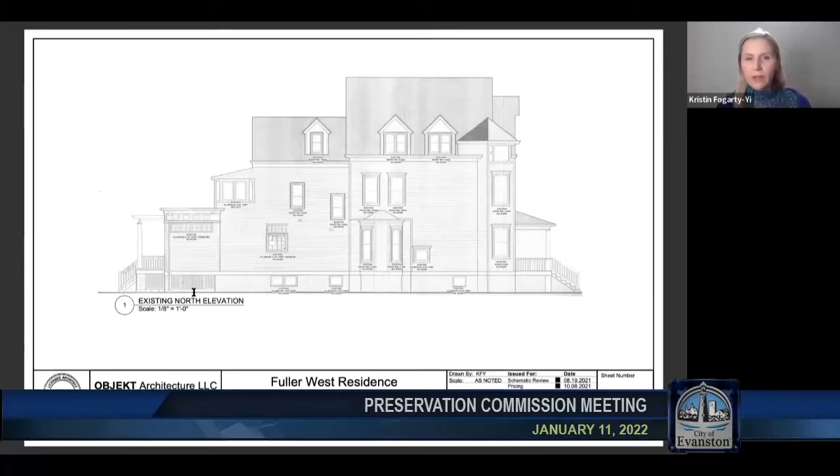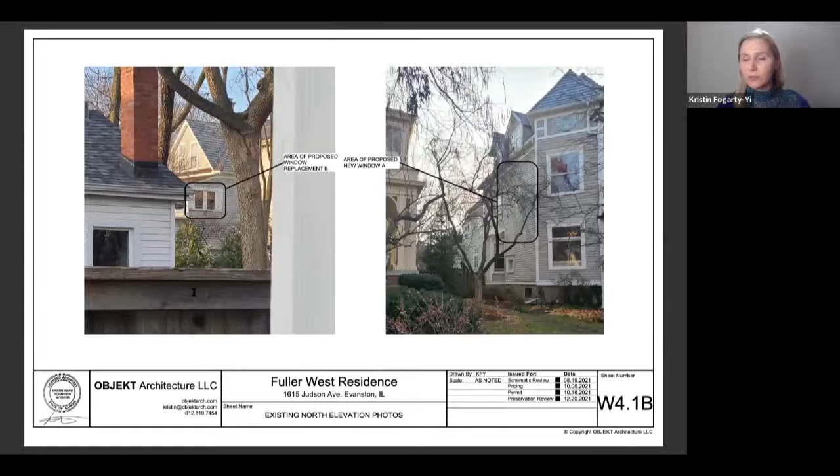If you go to the next page, in the area where we'd like to add window A, this is because there is an existing stairwell there, and the window right next to it to the left is currently the only window in the stair hall. We are adding a laundry room there, so that will no longer add natural light to the stairwell. So to keep having natural light in the stairwell, I propose to add a new window at the stairwell.

Window B at the rear of the home is to be replaced with a new window. It's basically in the same location as the existing one, but with slight modifications - it will be 2 casement windows next to each other. There is also an existing flat roof, an addition added in 1997, and we'd like to turn that into a roof deck. So I propose to add a small, very delicate metal railing to act as a guardrail, because the existing parapet is only 2 feet tall.

This was an addition added in 1997, and the interior floor plan is changing. So to do that, I am proposing to rearrange the windows and add a patio door, which is window C, and also a bay window at window D, because the new floor plan needed a little extra room at the primary bathroom. The new roof would be overlaid over the existing roof. And these are the details of those windows.

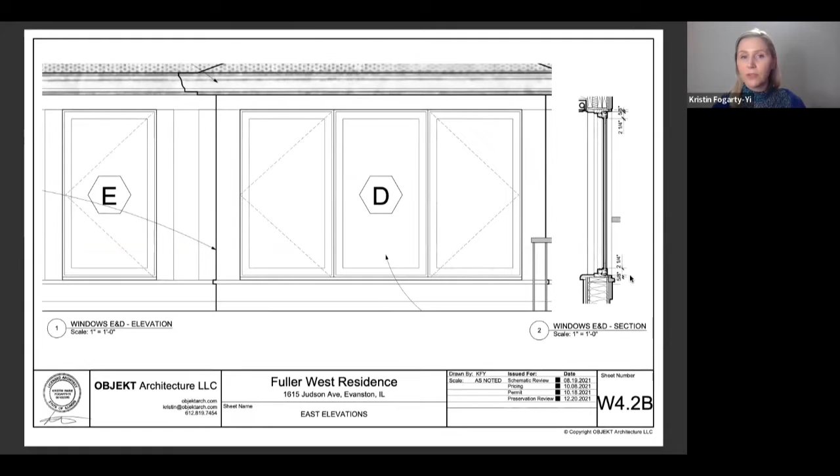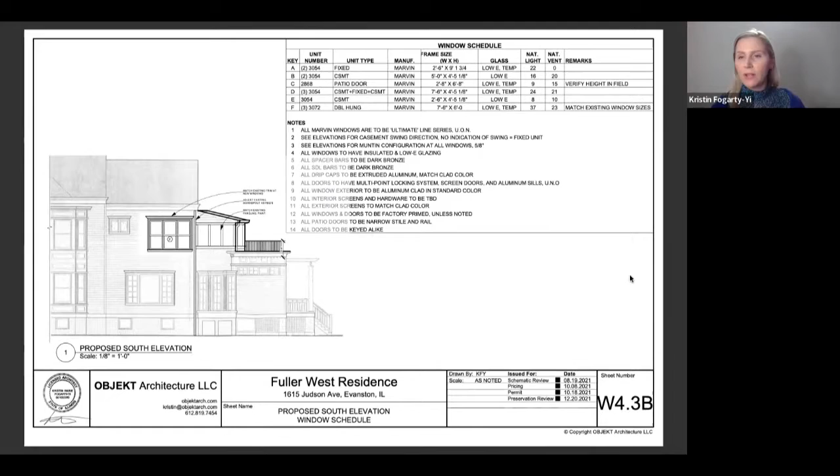If you flip to the next page, this is where the new window is being proposed to add. It has a similar configuration to other windows on the home, and it will have the same exterior details of the existing windows. And that's the detail of the window.

And then if you move to the rear of the home, you can see the new layout for the primary suite and the window configurations there. So you've got those along the back as well as at the south elevation for the primary bedroom.

Anything else you'd like to present? No, that's okay, thank you. Okay, questions from the commission?

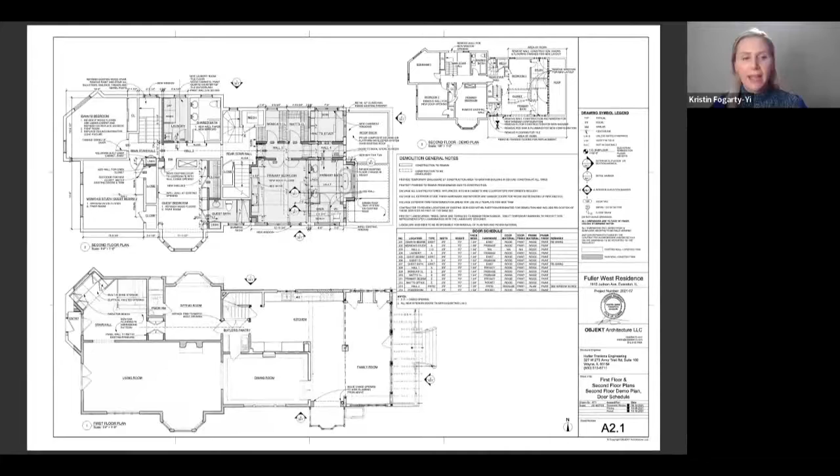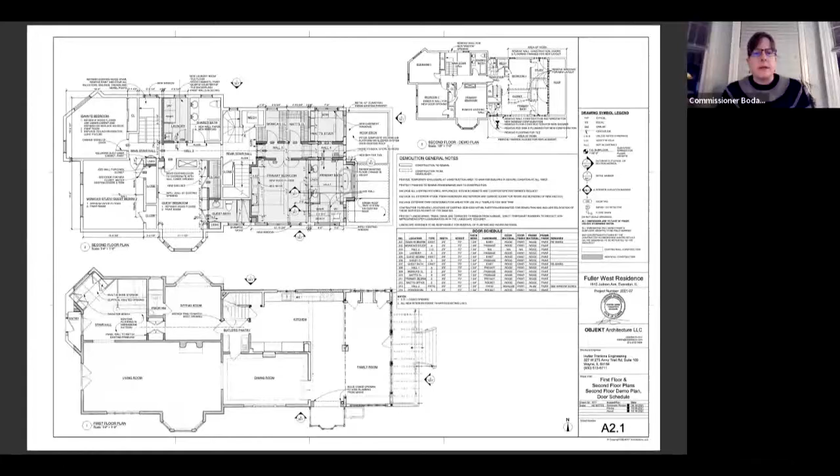And another question about materials. You said that up on the second floor, you're going to be adding a little 2-foot railing at that low roof by the parapet. Is there already a metal railing on the house, or is the railing down below wood, or what kind of materials are already there? So currently there is not a railing because the flat portion of the roof is not accessible right now, but we want to make it accessible. And so to not make changes to the existing parapet, which carries that detail on it.

Again, this was an addition added in 1997. Within the area behind the parapet, we are going to add a guardrail for life and safety. Got it. But then down like right underneath that roof, I think there's some railing down at the first floor level, right? So I was just wondering what materials those are.

So looking at the rear elevation on this page, it's the middle photo here, you can see... I believe that is metal railing there, but I'm not certain because I actually haven't stood in the backyard since we were doing work to the second floor.

What about the railing at the front of the house on the west elevation? What does that railing at the front of the house look like? Yeah, the railing at the front of the house is actually an enclosed railing here. You can see it in the front. Oh, up there, I'm sorry. That is wood, painted wood.

So you're really making an open railing like the one on the balcony at the front of the house? What's the profile of the balusters, are they the same on the front as the one you're proposing? The ones at the front are square and I'm proposing square in the back, but I'm proposing that it's made out of metal and painted a dark color, so you don't see it. It really goes away. Why would it be bad to see it if you see the one at the front of the house? Because that way we don't change the look of the back of the house, how it currently exists.

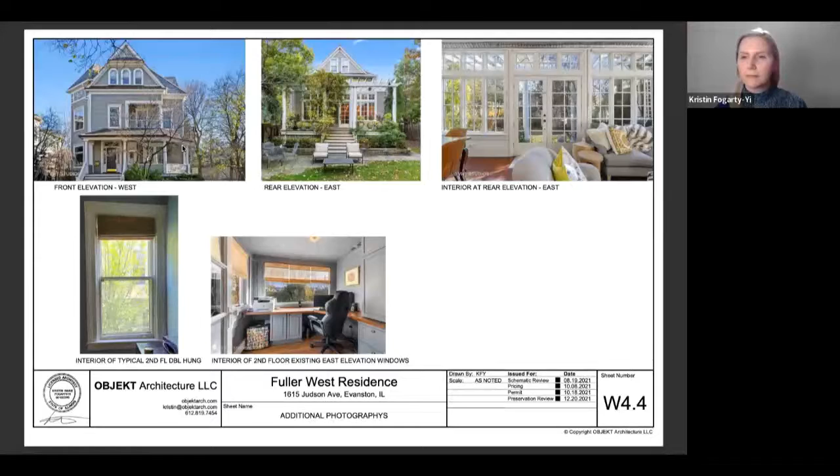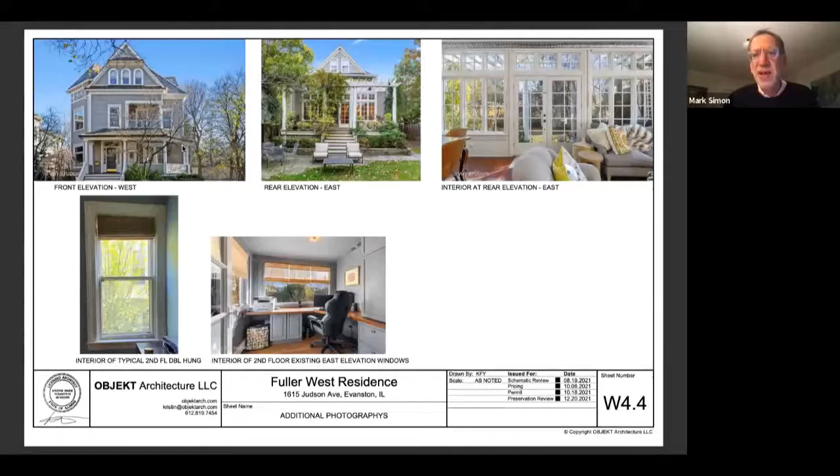As to the new kind of vertical window in the stairwell, just from looking at the drawing, I was having a hard time figuring out how the divisions are related. Are they related to the other windows? You can't tell just by looking.

Sure. The muntin style is designed to match the muntins on many of the first floor windows. On this particular elevation, the first floor has casement windows with transoms, and there are transom windows at the back with a muntin configuration on them.

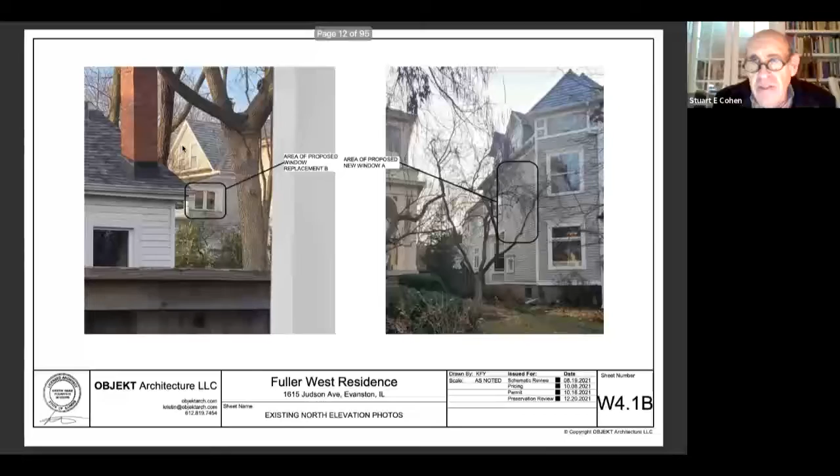And if you go to the south and east elevations, the rear elevation, those all have muntins too. So because all the special windows had muntins, I wanted to carry that same style into the stairwell. Okay, but in reality, you're matching the choices made for the 1897 addition and putting divided light windows next to larger scale double hung windows. I wonder if you ever thought about doing something that would look like a stack of two double hung windows, with a single division at the center.

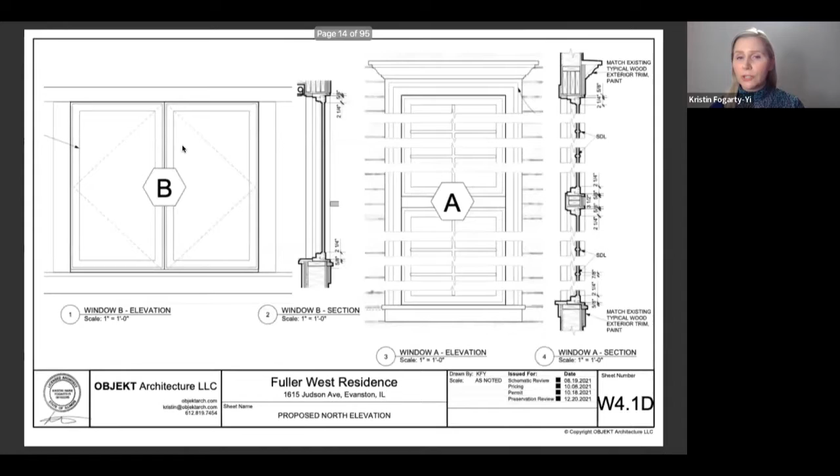If we go to the south elevation, I was actually inspired by the original wood windows existing on the home for the southern bay. You can see on this elevation there's this bay of triple windows here, and because they are special, I wanted to match that special detail.

Also in the living room section, there's not that on the elevation, but you can see in this photo there are upper windows more towards the front, in the living room. And on the front of the building there are doors with a muntin configuration. Since you can see the stairwell at the same time, I thought it would be lovely to see those all together.

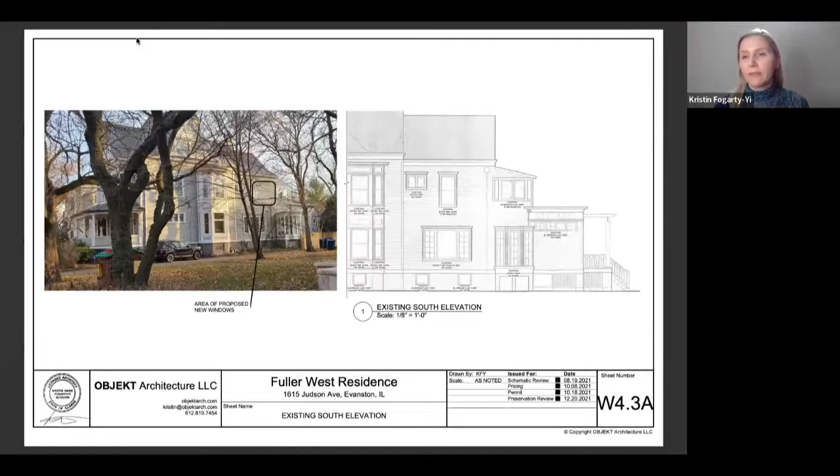Do we know that the windows we're looking at on the south elevation are original to the house? Yes, they are. Or were they part of the 1890s redo, when the house went from Italianate to Queen Anne? I'm not certain of that. I'm only aware of the 1897 addition because I have drawings from the original architect.

I think that was from the 1890s. Then you can see this rear volume — this was an addition done back here, I believe, in the 1920s.

My experience of things like this is you would have had a consistency throughout the older part of the house, in the redo from close to the turn of the century. Then sometime in the teens or 20s, typically porches were enclosed with casement windows, which were frequently divided light. So the existing conditions we're faced with are divided light or double hung, which leads me to a question — if we could go to the rear elevation, Cade.

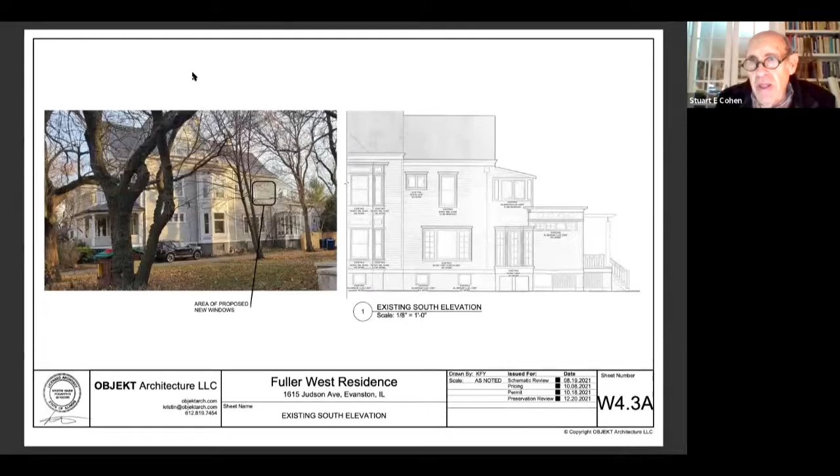While I think this elevation is a great improvement over that, with the three-part division and the scale of the windows, the question is why are the casements not divided light casements? Or why are they not double hung windows, given they're in the scale and proportion of the double hung windows in the gable end above, or in the rest of the house?

I know sorting out design questions like this is always a difficult issue for the designer, but I'm wondering what happens — even though you subdivide it further with undivided pieces of glass — in terms of relating to the scale of all the other windows in the house.

Well, I was keeping in kind with the fact that a majority of the windows on the second floor don't have divided lights, so I really was going with that. My concern with making them double hungs is obviously the function, and certainly we could make them look like double hungs and they still act as casements.

These windows are shorter than the double hungs in the rest of the second floor. So the second floor has very tall double hungs. My concern was that they just proportionally didn't make it look as tall as perhaps the other windows.

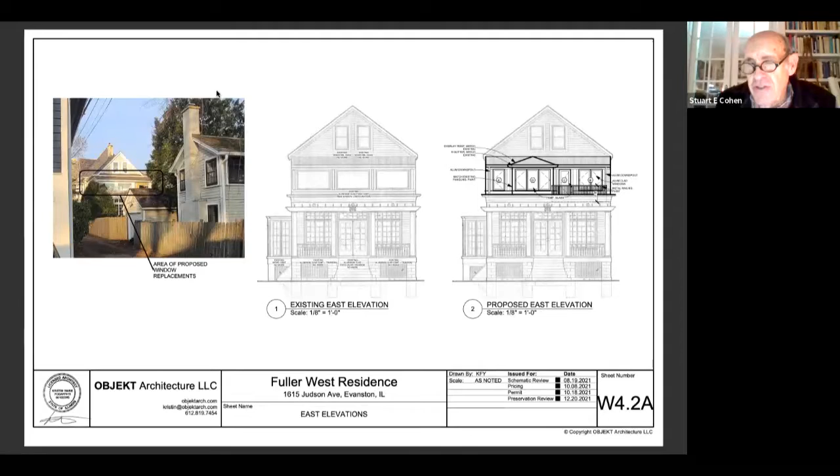Oh, thank you. I think the master suite, bathroom, and closets are very skillfully done. Oh, thank you so much. I appreciate that.

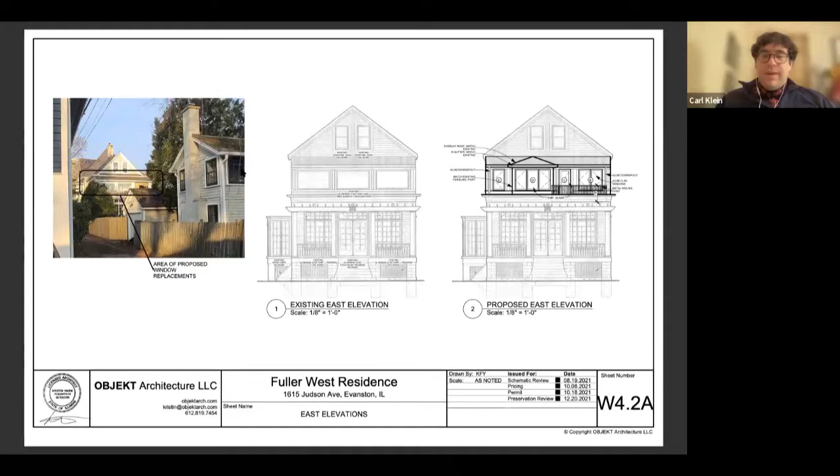I have a question. Did you consider, instead of doing one big double hung window on the north elevation, instead of what Commissioner Cohen suggested, a stack of double hungs, but what about a triple hung window? So that it could be a tall, the same vertical opening, but so it looked like 3 divisions. Sure, yeah, I did not consider that.

As I mentioned before, I was really inspired by the bay that's on the first floor and carrying out that detail, because the stairwell is such a beautifully crafted stair. It has all the original wood and railing details. I just felt carrying out that detail of the muntins would look really beautiful matched with the interiors.

Yeah, it also seems like you've been careful about the alignment of both the heads of the windows and the mullion between the 2 units. Looks like it's very close to being at the level of the sill, or perhaps is.

Yeah, because I very much wanted it to feel in kind with the windows next door, but because it is a stairwell, oftentimes you do find that's where that special window is, such as a stained glass window or something different and special in a stairwell.

I've forgotten the plan, but could you actually physically widen those so they were the same width and height as the windows immediately to the left? Yes.

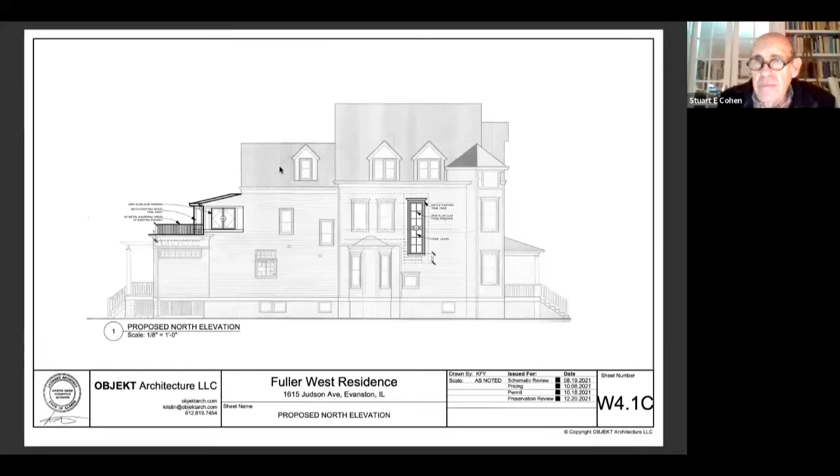I am fine with having it for consideration. I agree, consideration would be acceptable. I agree with that too. I agree. Okay, all right.

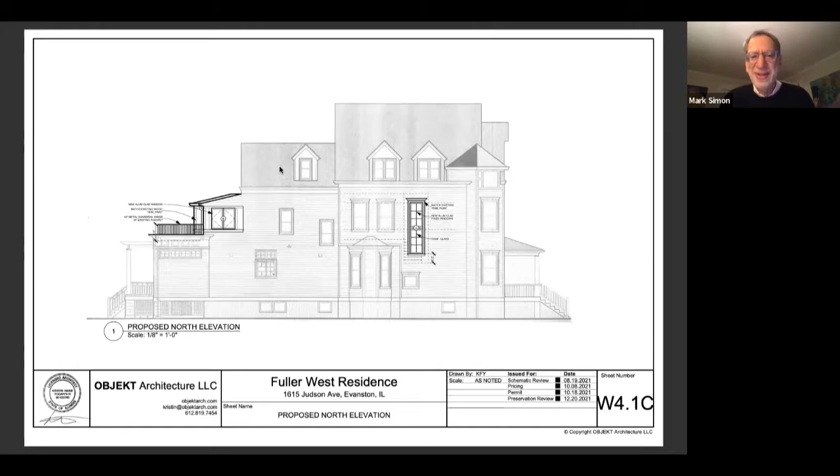I can do it. Are we going to put in the motion words to that effect about the horizontal meeting rail on the bathroom windows? I think on the stair windows, something about the stair windows as well. And if so, how do you do that as part of a motion, Mark?

Just that we request that the applicant consider those changes and seek administrative approval. But just use the word consider, I'd say.

Well, then I'm still confused about what the motion would contain, and I think other people must be as well. That's why you didn't have a rush of people wanting to make the motion.

So if we're approving it, then we've approved it as submitted and are just suggesting to Kirsten that she look at them, and it would imply that she doesn't have to come back for any kind of re-review, even if it's just Cade and Carlos. Maybe we need Cade and Carlos's help to clarify how this would work.

I think if the applicant's going to change the design, they do need to come back to just register the final plans, basically. But what you suggested leaves that at their discretion. Yes, I mean, that's what I think the consensus of the commission was, to just ask them to consider it as part of the motion.

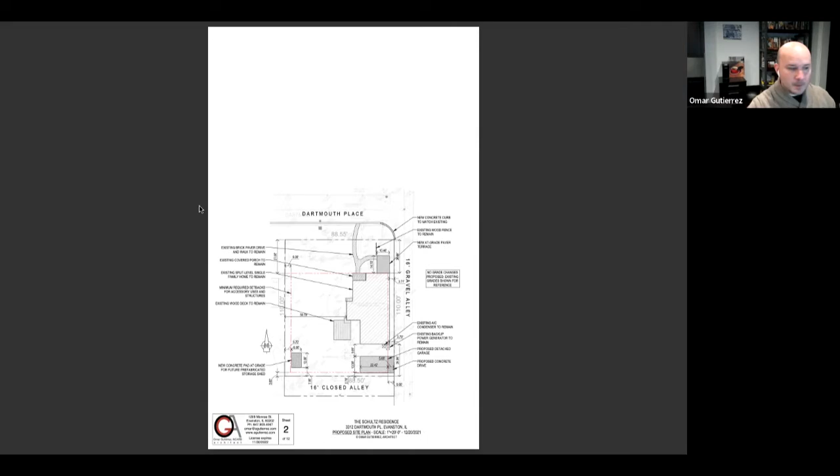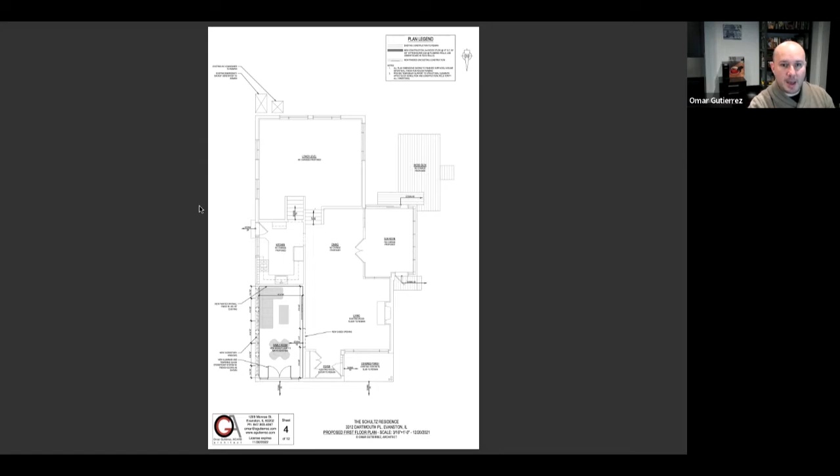This is the proposed plan of the family room. The windows on the east side of that family room, again mimicking the existing pair, will be rather high for privacy. Then there's a pair of windows and side lights on the north end leading to the small patio where the existing paver driveway is.

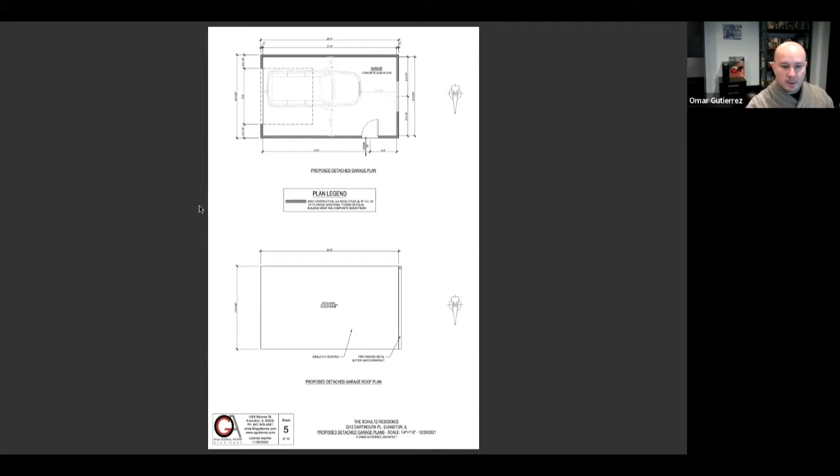There will be lots of light. There is some vegetation and some fencing that exists there that will remain, which will provide some of the privacy that my clients would need there.

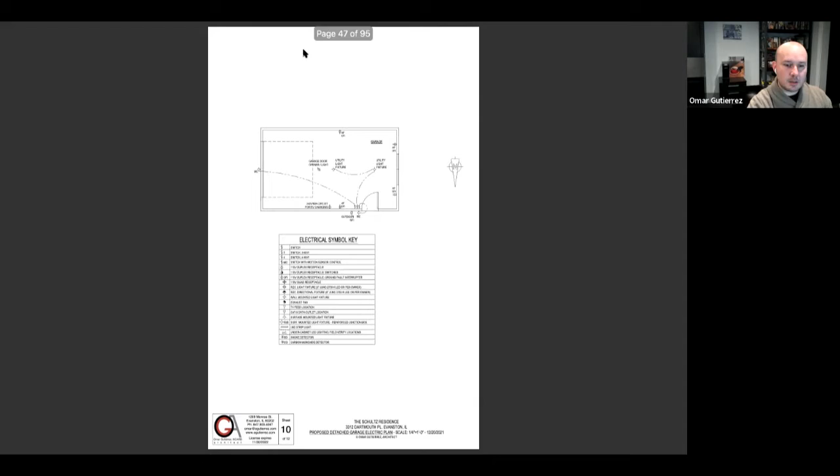Do we have the 3D models, Kate, that we could present? Yeah, or they're in here. I could share my screen too. Let me pull them up. Oh, here's the window details.

If you go back to... there you go. Maybe just to the window details. Oh sorry, these are the existing ones. They're very, very simple wood windows.

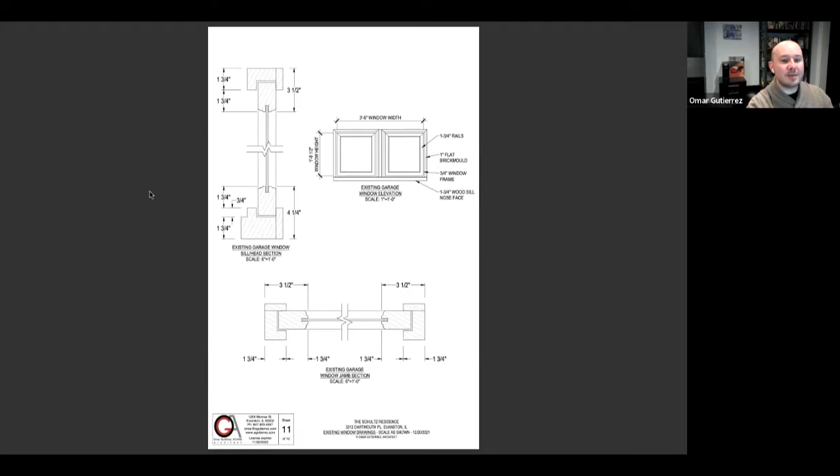They are all wood right now. There is a precedent in the home in other areas where the windows are clad. We don't know if they're original or not. They don't look very new at all, so it's possible originally these windows were just a lower grade or a different type. They're atypical in the home; all the other ones are clad.

And then the new window, we look at the profiles being very, very similar in thickness and appearance. I'm talking 1/8 of an inch, 1/4 inch difference here and there, but they're very similar, and the proportions are much the same as well.

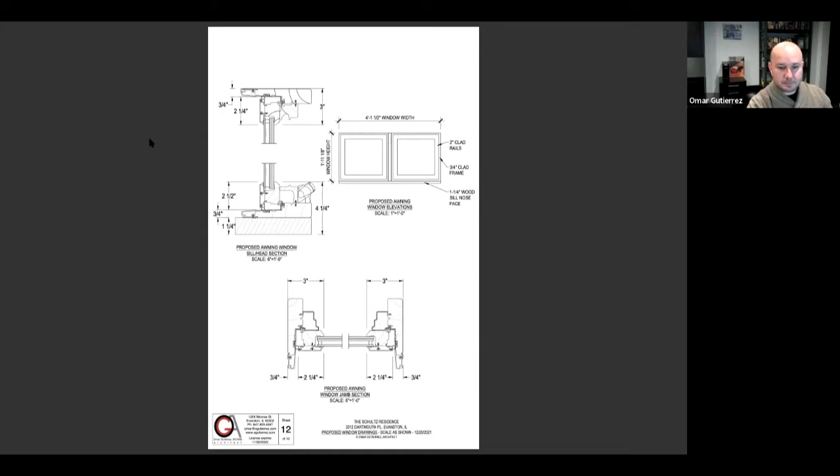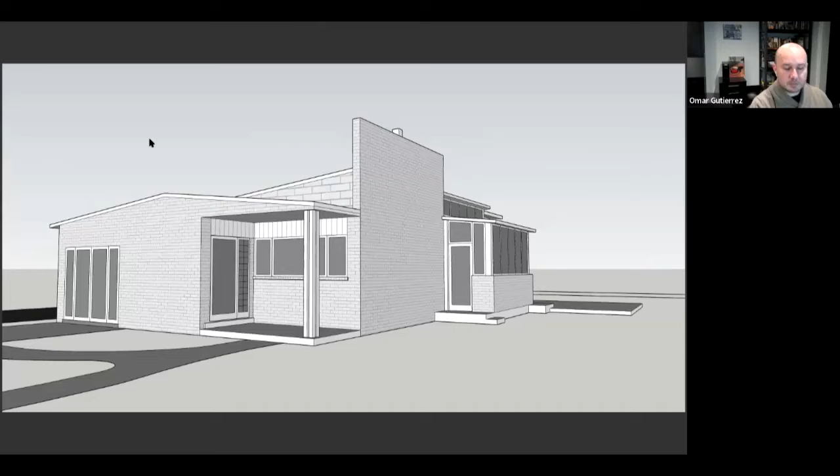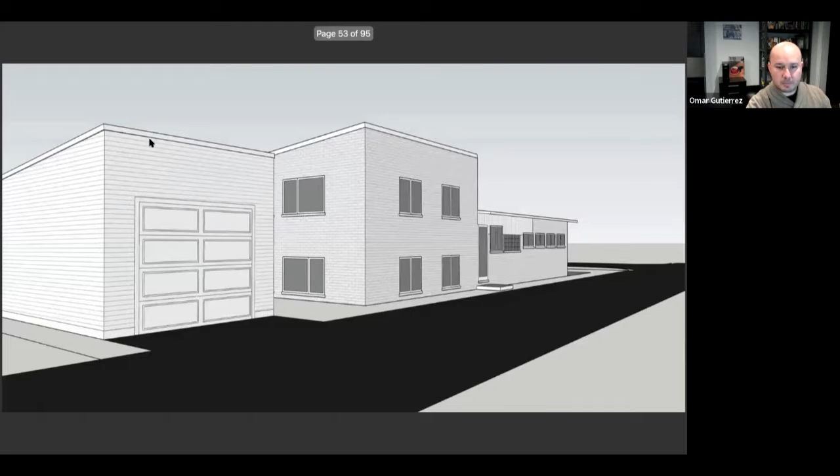This is a view from the alley. And then some aerials show a little bit more of the context.

This is a home built in 1940. It was designed by George Fred Keck. I believe it's one of the first, if not the first, modern home in the city of Evanston.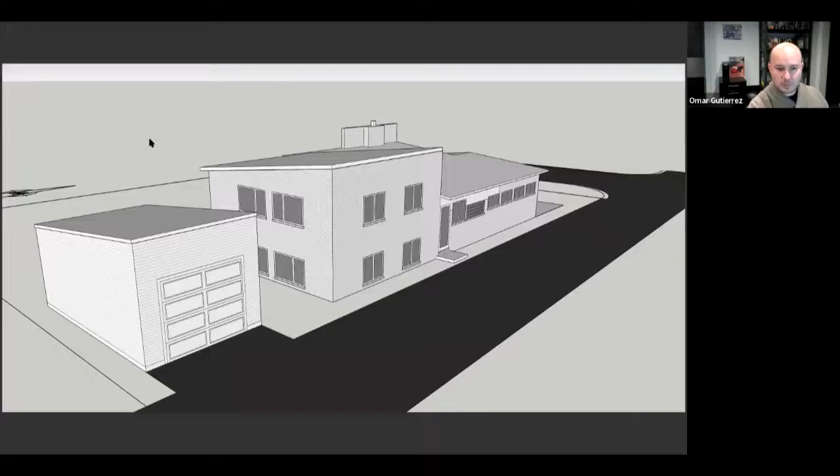That is the overhead door that we're replacing, where the numbers are. This is the kitchen door accessible from the alley, and this is what you see in the alley—that big fence that really obstructs the view quite a bit.

This is the area where the garage is proposed. I think that concludes my presentation. If you guys have any questions, I'm happy to answer.

Thank you. Any questions or discussion? I have a couple questions real quick. First off, I wanted to compliment you on the number of pictures and your 3D models—it made it very easy to understand your application. Welcome, we appreciate that. Thank you.

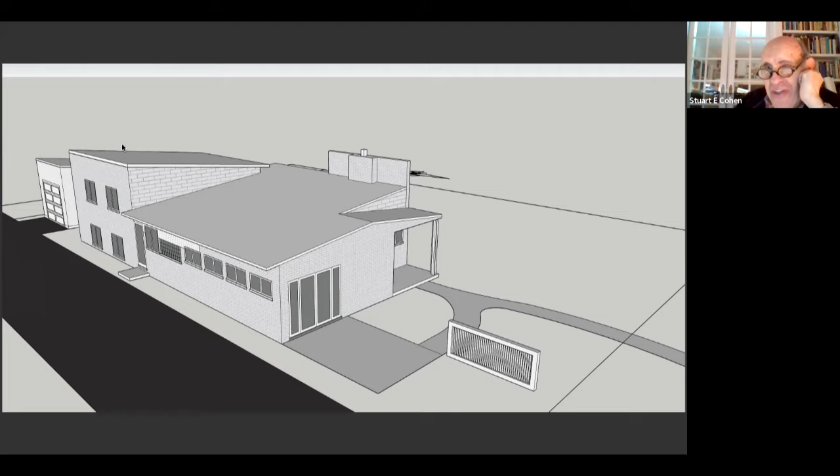It would only go to help his reputation or further enhance it.

Sure. There's something we could do here too, and we could go either way. We could take all these windows and bring them down to match the sill height, and we'll be within an inch of the top of those windows where the siding currently ends. So we could easily match that. They just wouldn't match the height of the front facing doors, which we felt would be a nice thing to do. It's always nice to align heads of windows and heads of doors, but in this case, maybe it would be more important to have all of those windows read as a band or almost a ribbon window.

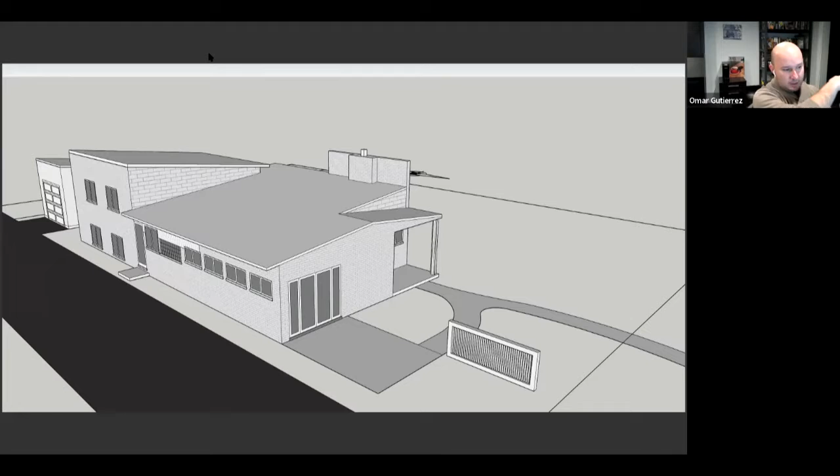Correct. So the glass blocks are 6 by 6, so they're 24 inches tall, plus a small, probably a brick mold or something. It would be virtually the same height, so we could easily bring it down. I believe it's 2.5 courses of bricks, so we're talking less than 8 inches. We would still get the desired effect on the inside because it would be higher windows, and then all the tops and sills could align. That's something we could easily do.

Yeah, that would be my preference there.

I have a question for you, and I'm assuming it's a budgetary decision, since the bulk of the house is brick and you're doing the garage in wood rather than a brick veneer. Was that because of the client's budget? It's actually because of the space. We need to have a certain distance between the home and the garage, 10 feet, and by the time you add the veneer, you end up with something rather narrow.

You're adding 4 inches to the garage. Are you really up against the setbacks to the point where it's that close, Omar? They actually round up, we have to use the rounding rules in the code to make it compliant. All right, well, that's a good answer.

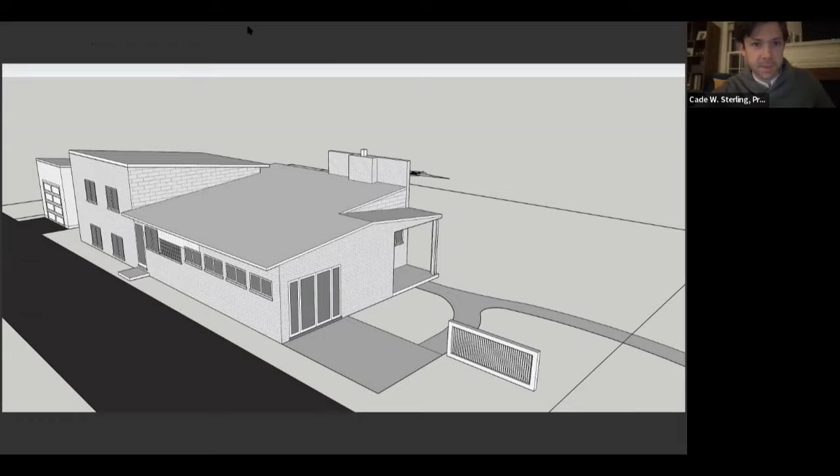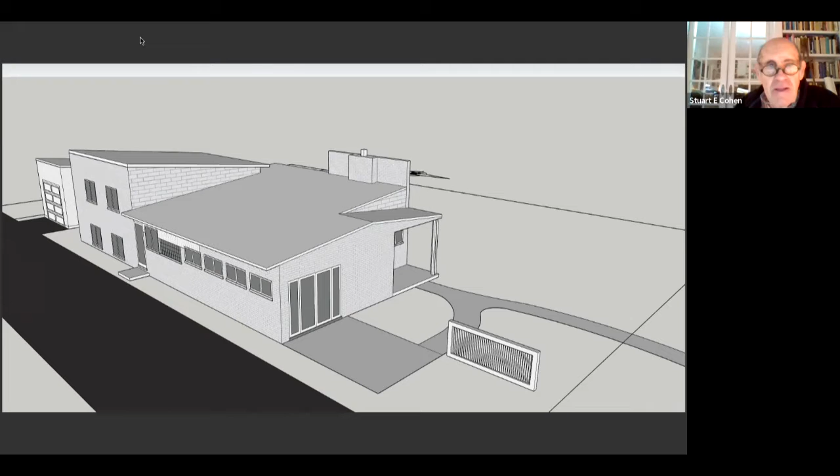Thank you, but we are trying to bring in some of the materials that we see in the home. Well, the materials are curious all by themselves because you get panels of vertical siding, and then the pieces that project up above the roof are shingled. Correct, there's some sort of wide shingle in a running bond pattern, and then of course the painted brick everywhere. So we're using horizontal siding to match the exposure of the existing wood siding that's in the house. Okay, and it'll be painted, I assume, to correctly harmonize with the thing. Okay.

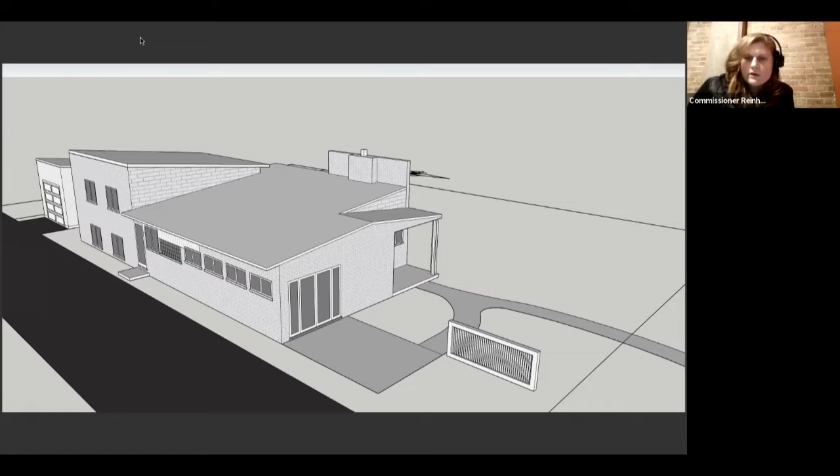Nice job. I had another quick question, and I may have been mistaken, but I thought I saw a note that the garage window was going to be a fiberglass window as opposed to the wood aluminum clad. Is that still the proposed option? The garage window, we would like to do that because they face the west side. They really would not be visible from any elevation, only from the yard. We could change that to an aluminum clad wood window. These are the 2 windows in question, but for budgetary reasons, we thought maybe there we just go with fiberglass.

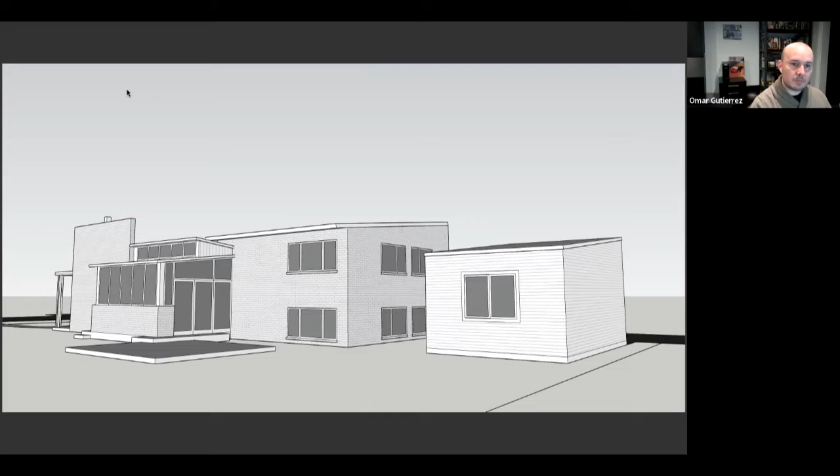I think, in my opinion, and I don't know what my fellow commissioners would say, but since it's a landmark building and we're already changing some of the materiality with the horizontal siding, I think it would be good to try to maintain those windows to be similar to what you're putting, if that's something you would consider.

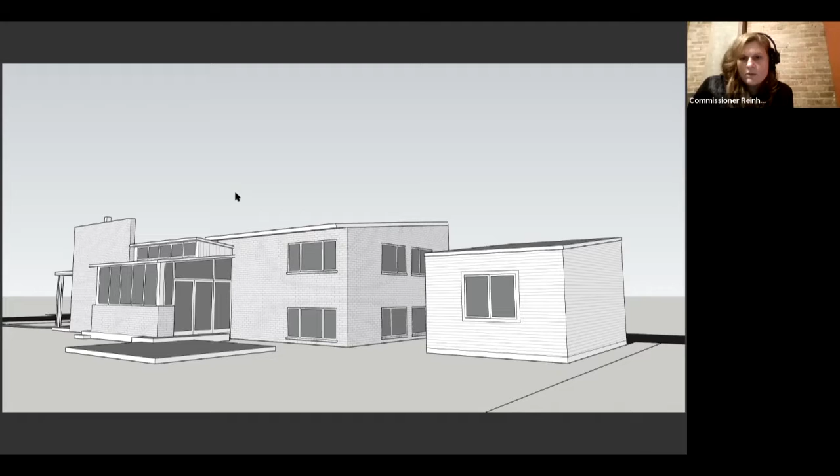And I think the other thing, it's probably minor and not something I necessarily require, but would it be possible to maybe match the pattern of the original garage door with the new door, just to pull that rhythm through? I know it's really minimal, but that's a possibility. I don't see why not. If there could be a consideration to maybe pick something similar to that, I don't think, in my opinion, that would be a requirement, but it might be nice to have something similar to the original pattern.

We could definitely source that. It's a pretty simple detailing, it's like square sticking panels. We could definitely find something, square patterns too kind of helps with some of the other stuff. So it's not something that needs to be carried in the motion, it would just be something for consideration.

Okay, I have a question. Kate, could you go to the back facade where the new doors have been added? Just to the elevation drawing.

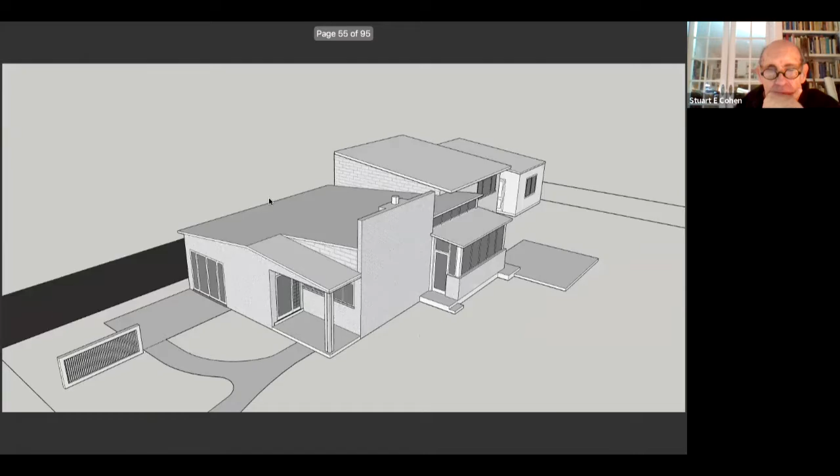Keep going. Yeah, that one. What does it say? Proposed front north elevation.

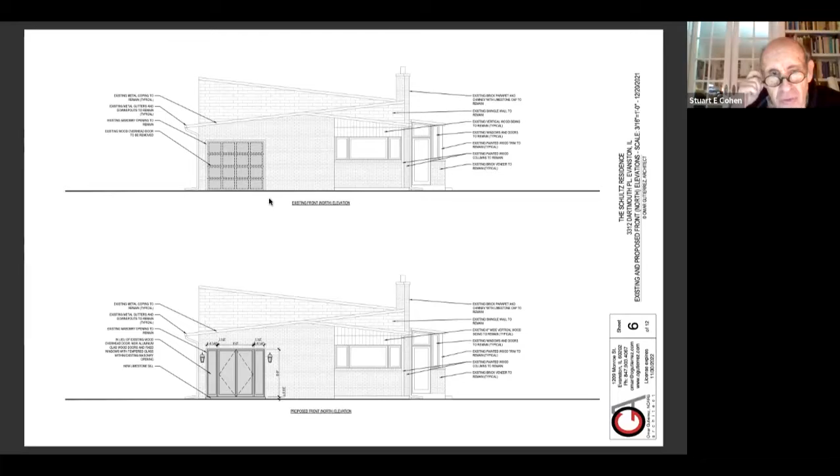What I'm sort of wondering about is the doors where you show the swing and you show them swinging in. The frame of the door is shown at the same thickness as the adjacent side lights, and is much thinner than the stile and rail shown on the existing older door. If it was a sliding door, I would understand the graphics, but won't you have to have enough stile there to put hardware in?

Is that just a graphic issue? I think it is. I think it is. You are correct, the stile there will be a little bit thicker than I'm showing. It'll look very much like the door on the right-hand side of that elevation, although that looks like it's drawn at about 3 inches.

Correct. And I think to center a lock set based on back set of modern hardware, you need at least 4.5 inches. So I don't know, but it's not an issue with the design for me, I just wanted to ask about it. Yeah, I think it is a graphics issue, the stiles are going to be a little bit thicker.

Is there any other discussion? All right, so in terms of a motion to approve, it seemed as if we want... I think the easy change was changing out the fiberglass window in the garage to a wood clad window.

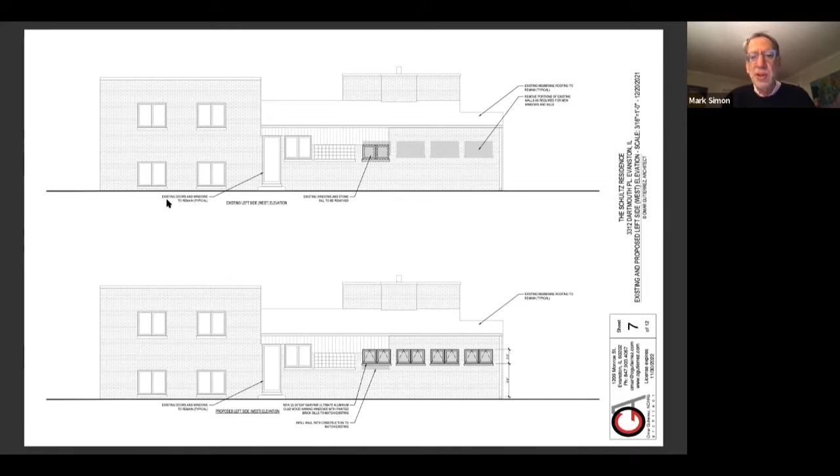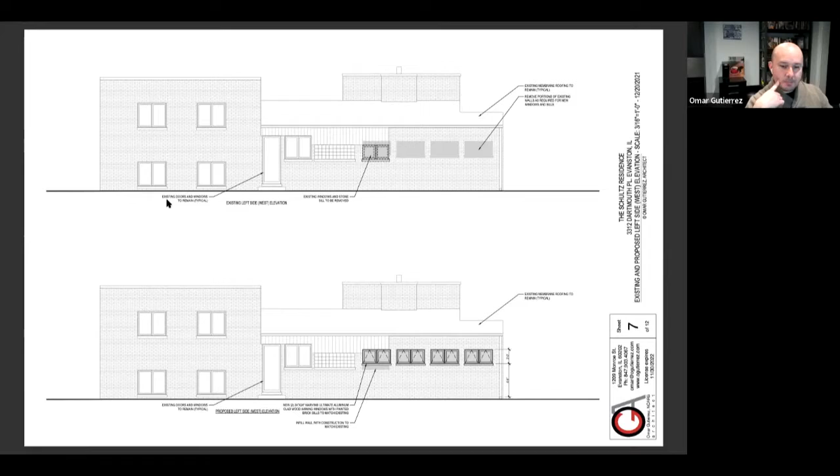Before we make that decision, what will happen to the height of the French doors around the corner if you lower those alley side windows? Well, we can't drop the floor because we need to build it up. And if we wanted to align that, it would require a custom door.

But more importantly, this is the existing opening already of the overhead door, so that was kind of the determining factor—there's an existing opening that we're going to work within. So they may not line up. It's one of those things.

Which one do you line up, the doors or the glass block window? We thought the door is actually a more prominent thing. That corner might be the more prominent angle than just the side elevation, which is obscured by vegetation and a fence and is only visible from an alley, whereas this is visible from the street.

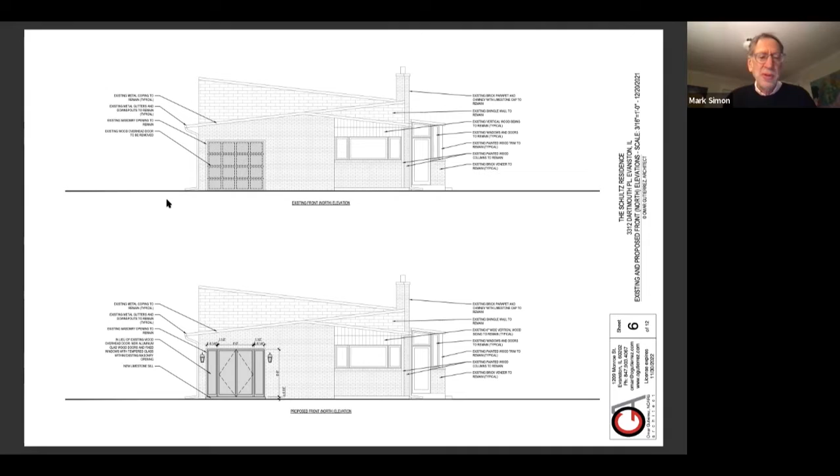I'm happy to leave that at your discretion. I think it makes sense. Now that we've heard the reasoning behind it, I think with the door being a fixed position and being an existing opening, I'd be okay with leaving it how they propose it.

I agree, because then you have a more primary elevation and view lining up. I agree similarly—I think it'd be successful either way. So I'm happy with it aligning with the door or dropping down to align with the sills.

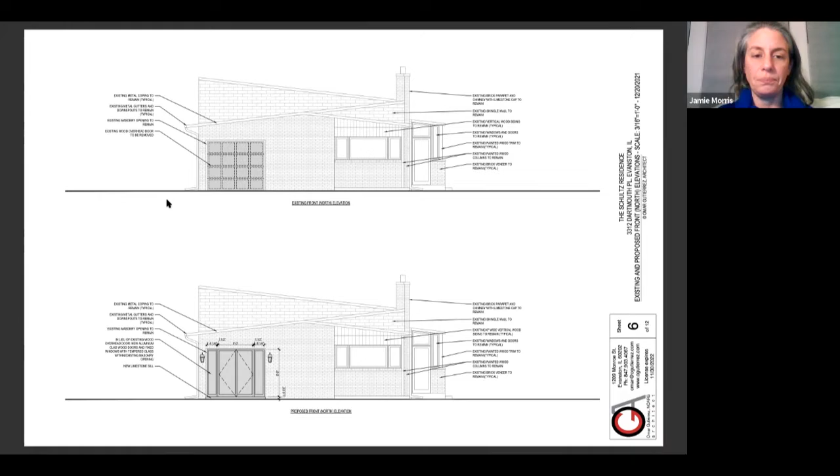The other consideration, admittedly, was that from the inside, the windows and the door will align as well. Yeah, important.

I did want to ask about the siding decision on the garage. I assume that is in our jurisdiction to say whether or not it could be horizontal or vertical. And there's so many materials here that I am concerned about adding another direction.

Well, the other issue for me is that if you did do it vertical, you could basically detail it so you wouldn't need the corner boards, which is actually a totally new design element.

To his credit, Omar originally proposed vertical siding, and I think myself and Carlos convinced him to go a different route. I personally felt it competed a little bit with the house, but he did propose vertical siding originally.

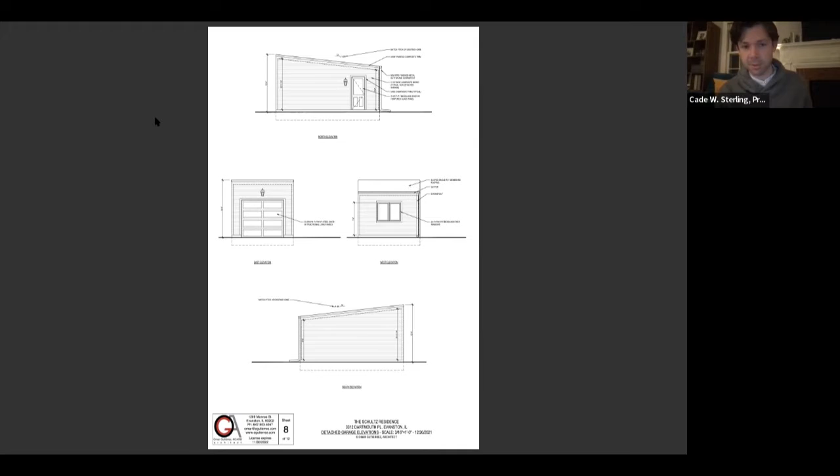I wanted to point something else out. What you see there on the side by the corners is actually not a corner board. It's a dash line showing the thickness of the actual wall. We're proposing mitered edges, which is just a cleaner, sleeker look.

Good for you. I'm looking at this on a laptop screen, which is the way I reviewed it the other day, and I read it as a corner board. If you're able to zoom in, you'll see that it's a dash line. Sorry about that. Okay, good.

If I may, the shingles on those upper portions of wall, are those just asphalt shingles? Yes. There are some sort of oversized running bond asphalt shingles. It's rather strange, I've never seen it before.

Yeah, if I may, can everybody hear me? Yeah. Okay, so to add to what Cade's response was to John, because the house is mainly brick and the original design had the vertical...

I thought it's not brick. So I thought that... We're losing you, Carlos, we can't hear you.

I hear you. No, I think we understand why you and Cade suggested the horizontal siding. I may have missed it - is the horizontal siding the exposed width of the face the same as the width of the vertical siding? Because I think that would be a nice way to visually help tie those together a little bit.

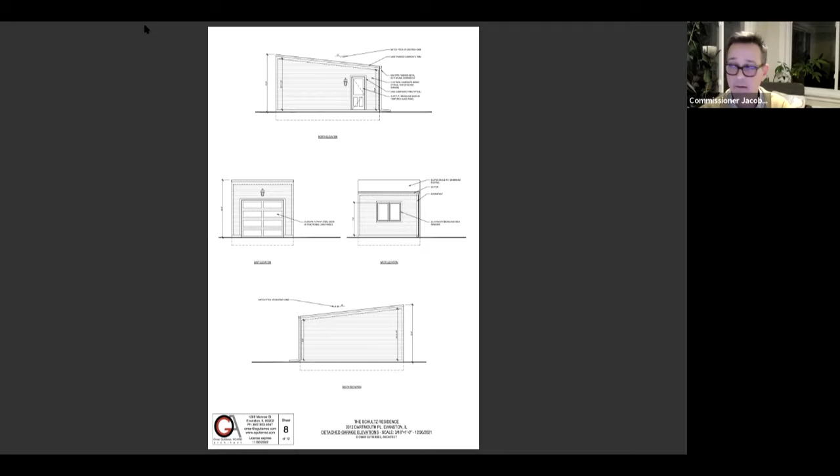Thank you. Gee, if you had a big budget, you could do siding like wood siding like at Mount Vernon. You could take the horizontal boards and put vertical V grooves in them and put them up as if they were in fact coursed masonry.

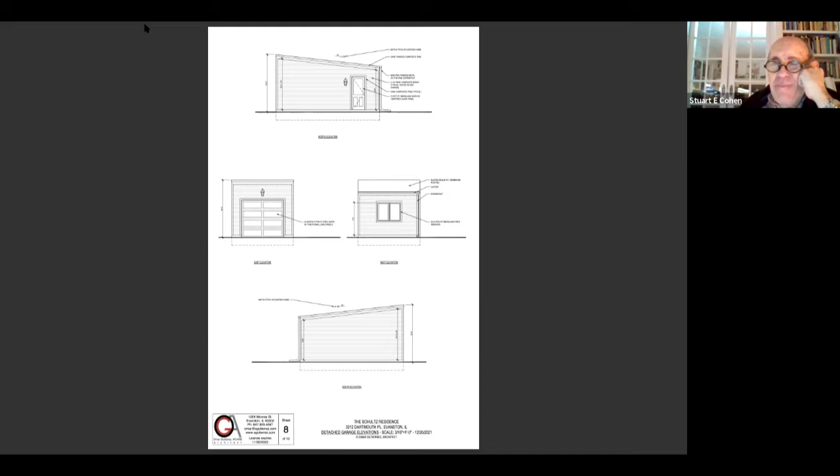Crazy. Well, we clearly have too much time tonight, so why don't we - somebody should make a motion. Yeah, I think the one aspect we were going to ask to be modified is the final window in the garage.